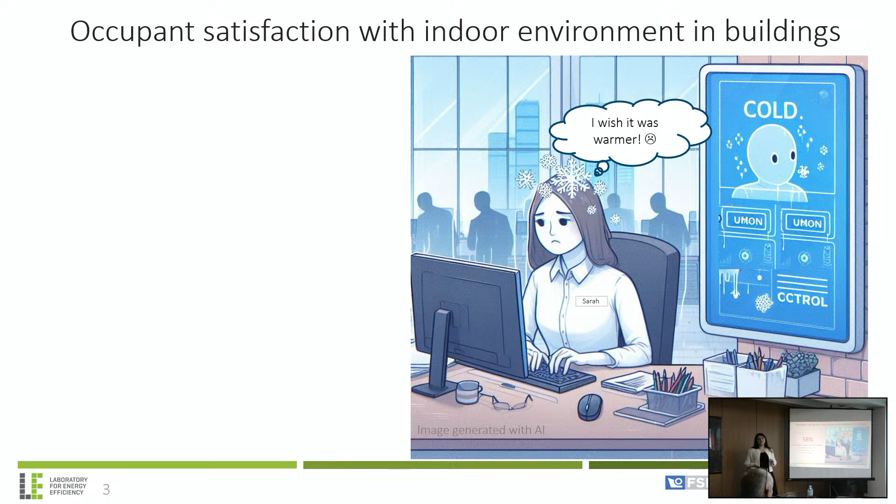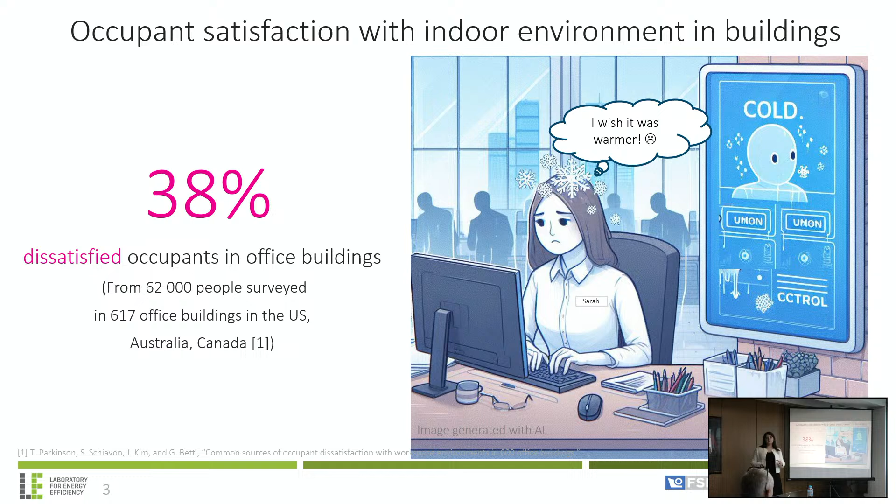So I'm going to start with a question that I think all of us can relate to, where we at some point have found ourselves being uncomfortable with the indoor conditions. So we were unsatisfied, and in some cases we even did not have the possibility to change the temperature setting or the indoor settings. And we are not alone in this, because 38% of occupants, based on a study made in more than 600 buildings, where 62,000 people were surveyed, said that they are uncomfortable or dissatisfied with the indoor conditions. Just to bring into comparison, according to standards, for a building to be operating well, it needs to satisfy at least 80% of its occupants.

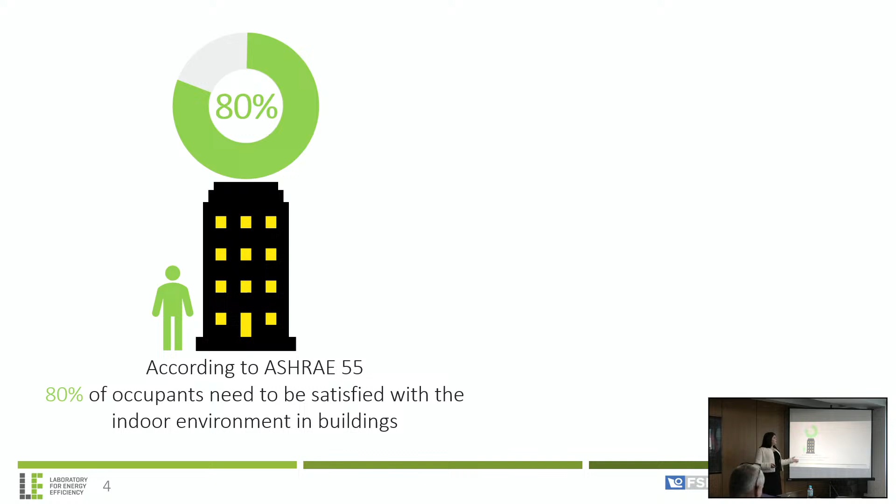And in another study done with more than 200 buildings, only 11% of those buildings achieved this 80% threshold. So the thing is that these studies were done in states like US, Canada, Finland, which means that they do not lack in technology or a proper control system or HVAC system, but sometimes higher automation or higher technology does not suffice for people to be comfortable.

So what we as engineers often forget is that buildings are actually built for users, and we should take into consideration the personal preferences of people, where some people simply prefer warmer ambience, some people prefer colder, and the usual root cause of this dissatisfaction with indoor environment is the individual comfort preferences and the lack of access to control. So that brought me to the first challenge that I wanted to tackle: how to integrate the occupant preferences into the automated control system. So how to enable this access to control and how to account for individual preferences. This brought me to a concept of human-centered control, which is a control system that prioritizes occupants.

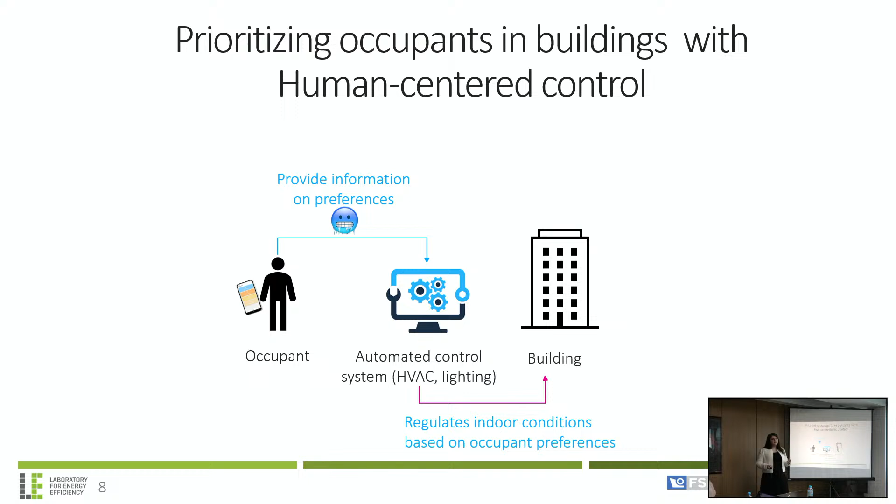Imagine this: an occupant or a person in a building reports their feedback or their opinion preferences either through a smartphone application or through another gadget. It provides that information to the automated control system, which considers that kind of preference and regulates the building based on those preferences. So this kind of integration of the user in a building enables us to have better human-building interaction while still prioritizing comfort, well-being, and satisfaction of occupants.

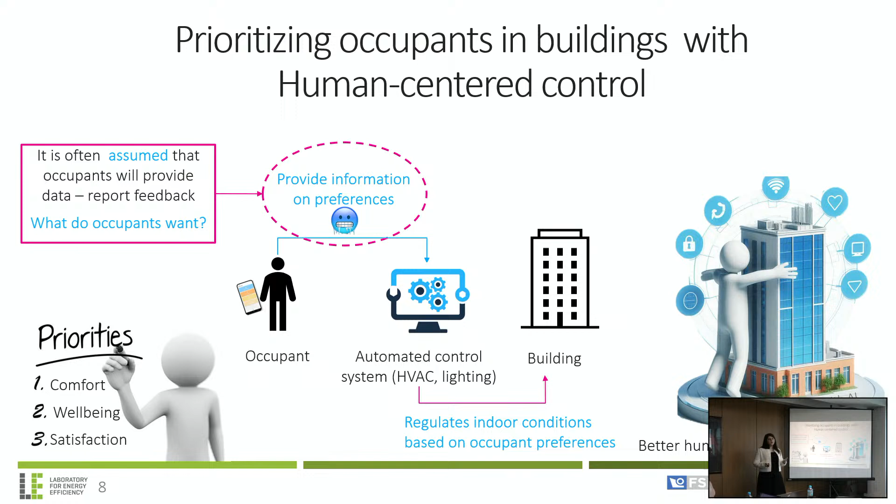However, in current research, because this is not a new concept, so people are researching it, this part where people are supposed to provide information or share their preferences with a controller is often assumed. So researchers assume that people will actually take a phone and provide their feedback or information. But the thing is, what do people actually want when it comes to this kind of interaction with the controller? This brings me to the second challenge: what are occupant preferences regarding the control systems, and are they willing to interact with the controllers by providing data?

When people are supposed to provide data, it can be tiresome, or it can be like a burden for them to report their feedback. What if we can learn those preferences and have a model that represents you? Imagine this: instead of providing information continuously, you provide it for a certain amount of time until the model learns your preferences, and you can create like a comfort model or your avatar, like a digital twin for you, which can know or represent your comfort preferences.

On the other side, when we speak of comfort, we often have this idea of thermal comfort, like temperature, but comfort entails different aspects as well, such as indoor air quality and visual comfort. This brought me to another challenge when I saw in the literature that most research focusing on personalized comfort models deals with thermal comfort only. And the thing is how to develop comfort models that also include visual and indoor air quality aspects, so to have multiple comfort aspects.

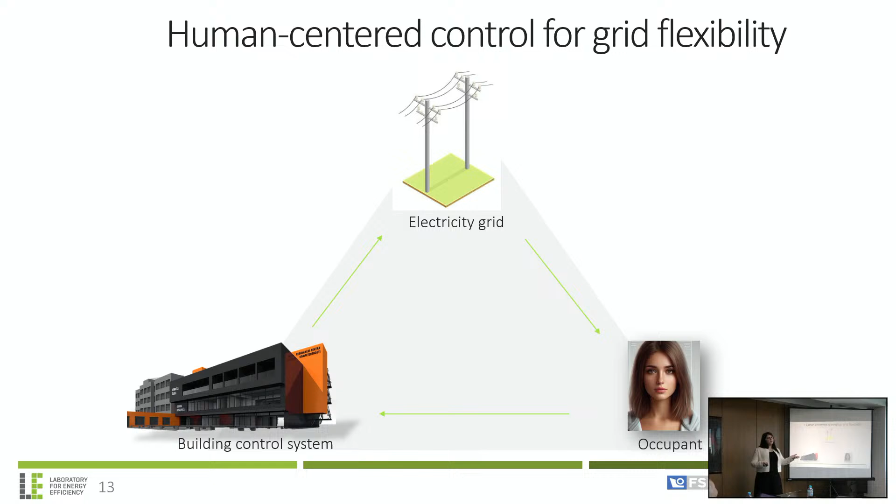Another thing, when we establish this human-building interaction, we can leverage it. We know that occupants are a significant contributor to the energy consumption in buildings. So buildings take the energy from the grid, and at times when the grid is overloaded, what if we can leverage this kind of connection to make a conscious decision on reducing the energy consumption, or use the energy from the grid when it has more energy than needed when we use renewables? So this kind of interaction can be leveraged with human-centered control. And this brought me to the last challenge: how to leverage this kind of interaction with occupants and control systems in buildings, and what is the impact of human-centered control on grid flexibility.

The goal of my thesis here is to provide a framework where we can integrate occupant preferences into building control by using personalized comfort models to regulate the indoor conditions. The hypothesis of my thesis is that integrating user control or using human-centered control systems in buildings enables us to increase the satisfaction of occupants with indoor conditions.

I divided this research into 4 topics. The first one deals with the human side of human-centered control by eliciting occupant preferences and their willingness to interact. The second topic includes the development of personalized comfort models, where I developed a method to have different comfort aspects for models. The third one is the integration of user preferences into the building control system, where I provide a framework on how to integrate users into the controller. And the last topic that I tackle is to define and quantify the impact of human-centered control on grid flexibility, so how to interact with the grid.

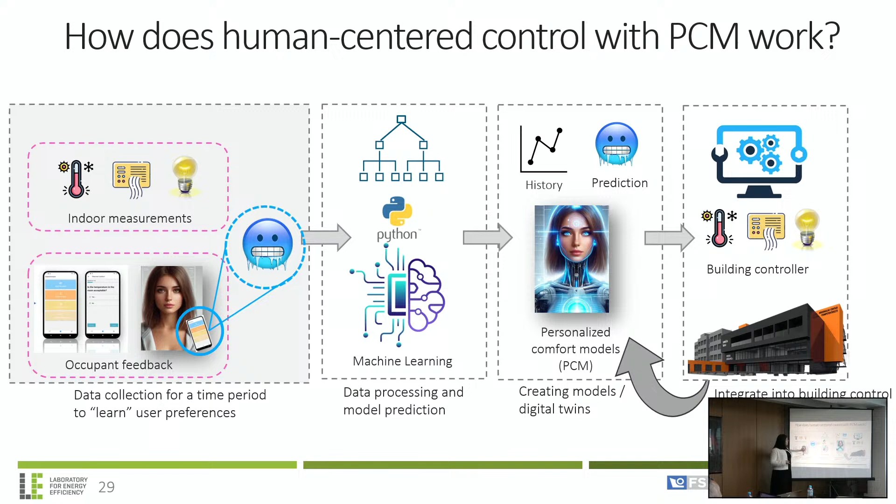And for instance, if Sarah here says that she's cold, then I collect this information and I develop personalized machine learning models which learn based on your historical provided data and can predict in the future how you would feel. These comfort models are connected to the control system of a building, which enables this integration. And then after some time, you will not need to provide information anymore, but the personalized comfort model will know your preferences.

So for the methods, I executed 2 experiments. The first one was a laboratory experiment where I collected data and I developed the personalized comfort models. The second is a field experiment where, again, I collected data, I tested the outcomes of the first experiment, and I integrated this human-centered control concept in an actual building. And I also employed machine learning models here to develop and compare different machine learning models.

So the first experiment was done in a laboratory, and here are the participants; 4 of them participated in the experiment. It was in an office for 3 weeks with 4 participants. Here we measured indoor parameters such as temperature, air humidity, CO2 levels, and lighting level. At the same time, they reported their subjective preferences and sensations, and I managed to collect up to 198 data points per person.

How I collected the subjective feedback: if you remember from the first part of my research, 66% of the users wanted to use a smartphone. So I developed a simple survey-based smartphone application where you can answer some questions to provide information on how you are feeling. I called it the Age Comfort app, and this can be used to report data, and the data collected here goes directly to update the personalized comfort models.

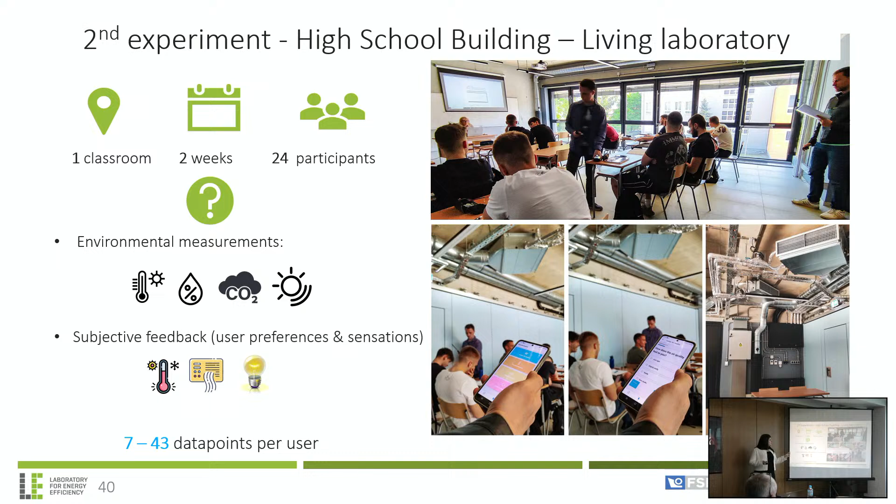However, here I had less control over the participants, so they were able to report whenever they feel like it, even if we nudge them to report feedback. So I had less data than the lab experiment and different feedback behavior of the participants.

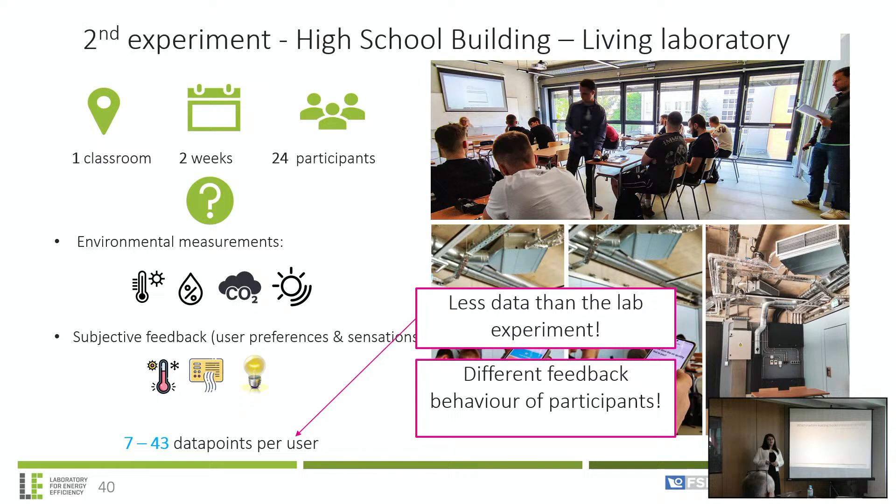So here again, I tested which machine learning model I can use if I have so little data, and I tested again the 9 different machine learning models, and I saw that decision trees work relatively well, even for less data, and for different engagement types. So even though I had some people with a very small number of data provided, this decision tree worked well.

So the takeaway from this is that regarding the set points, occupant preferences do not always comply with the standards that we have in buildings. The best models are these tree-based models, decision trees and random forest. Decision trees are particularly good when we have less data available, and we need at least 50 to 60 data points with variability to create stable personalized comfort models.

And if possible, it is good to have this kind of intervention days where you can on purpose make people feel uncomfortable just to know their comfort boundaries.

Okay, this brings me to the third research topic that I had, the integration of user preferences into building control. So here we had a kind of hands-on approach in a real building on integrating user preferences into a controller, and we saw firsthand what the user experience is, how people actually perceive or experience this kind of interaction with the building.

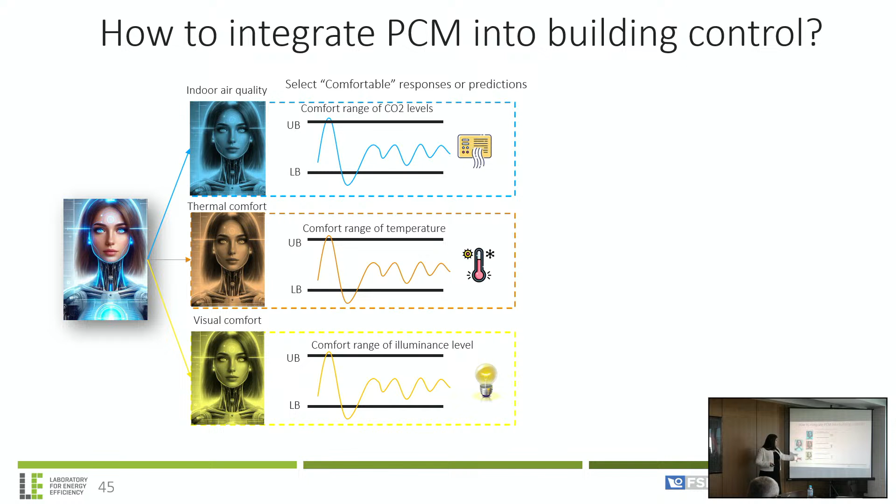So these days for testing were to adjust the building based on the comfort ranges of the occupants. So what I did is for one person, I developed their indoor air quality comfort model, thermal comfort model, and visual comfort model. However, in the building, here I'm going to show only the temperature. I did not integrate the visual part because we could not due to the constraints in the control system.

And the CO2 level was not needed because the preferences of the occupants were more or less the same as the standards. However, the different part was the temperature. That is why here I'm focusing only on temperature. And I developed the models, and I saw the comfort profile of the occupants, and I took a standard deviation with 95% confidence interval, which satisfies most of the occupants.

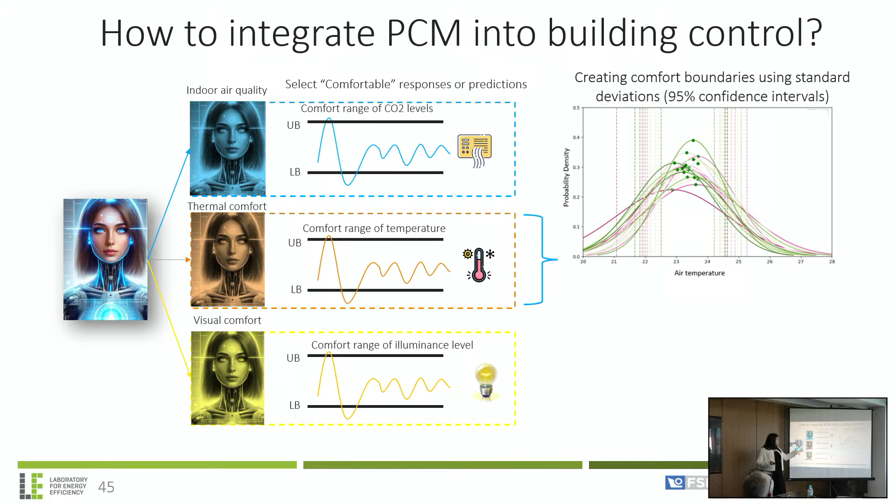So again, even if I have a different group of people, their comfort kind of overlapped with one another, and from the field experiment, this was the comfort range where most of my participants were comfortable, and this was integrated into the building.

So if I took this comfort range and I tested it for 3 days, I saw that before the integration, so the participants were not informed which days we are including their preferences and which days not. But before integration, when asked, 40.5% were satisfied, and after the integration days with similar outdoor conditions, I achieved 57.2% satisfaction. So a 16.7% increase and a 15% decrease in dissatisfaction.

This supported my hypothesis that implementing human-centered control actually increases the satisfaction of occupants. And now, if we have this 50% dissatisfied people, we kind of made our building go into that 11% of buildings that satisfy the ASHRAE standard.

And in context, what does it mean to have a 15% decrease in dissatisfaction? From the first study, where they surveyed 62,000 people, if we managed to make 15% of that group feel better or be more satisfied, it would mean that we would have 9,300 people more satisfied, which to me is a significant impact.

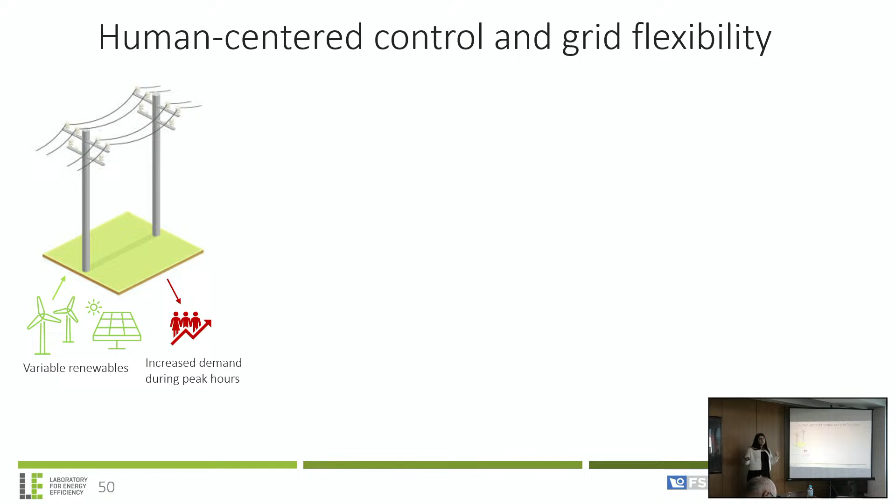And this brings me to the last part of my research, which is the impact of human-centered control on grid flexibility: how can human-centered control affect grid flexibility, costs, and comfort. Nowadays the electricity grid has a lot of renewables and also increasing demand in energy consumption. So we have grid overloads and fluctuating electricity prices, as we can see in real data from the Denmark energy grid. Here the red line is for January and the blue line is for August, and you can see how it varies for different hours during the day.

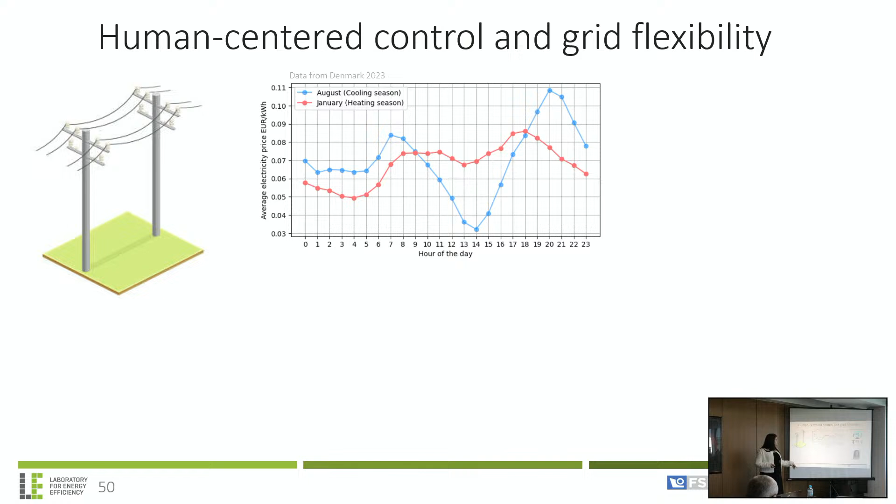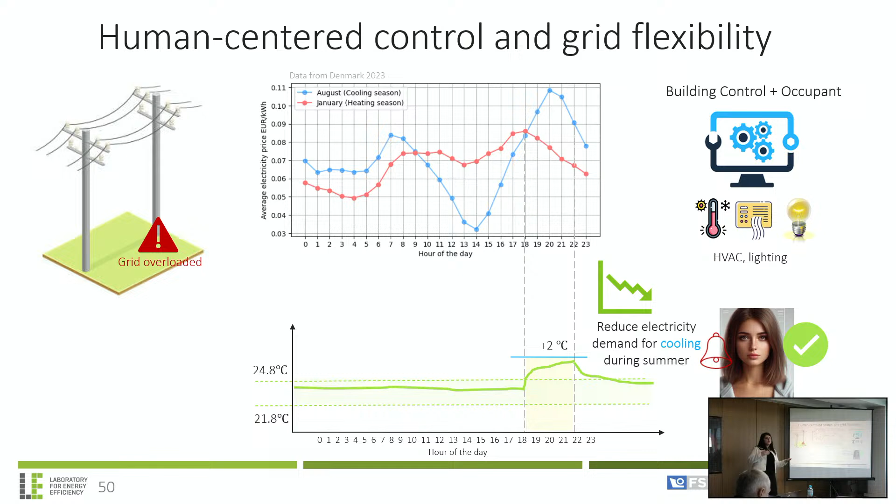If we can leverage control systems and humans in a building, then if we inform the occupant that the grid is overloaded, for instance, here we take Sarah and her comfort boundary. If she accepts less comfortable conditions, meaning she will reduce energy consumption, this would lead to a reduction in energy consumption, which will enable grid flexibility.

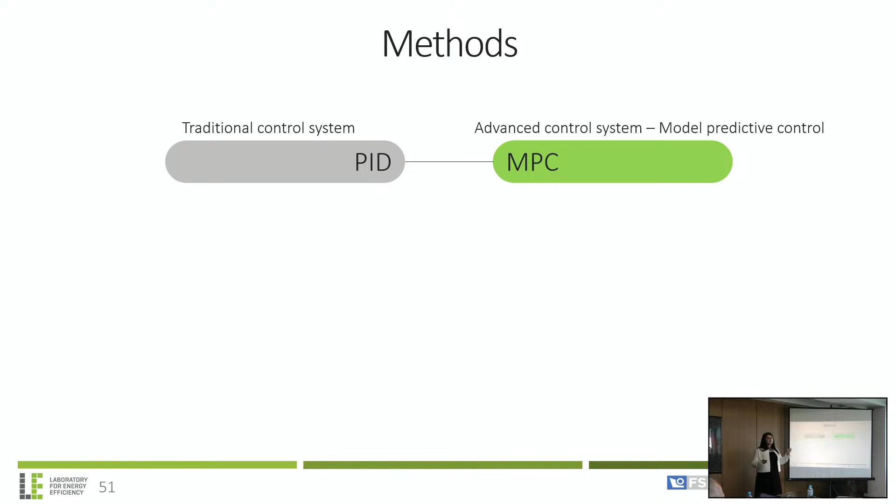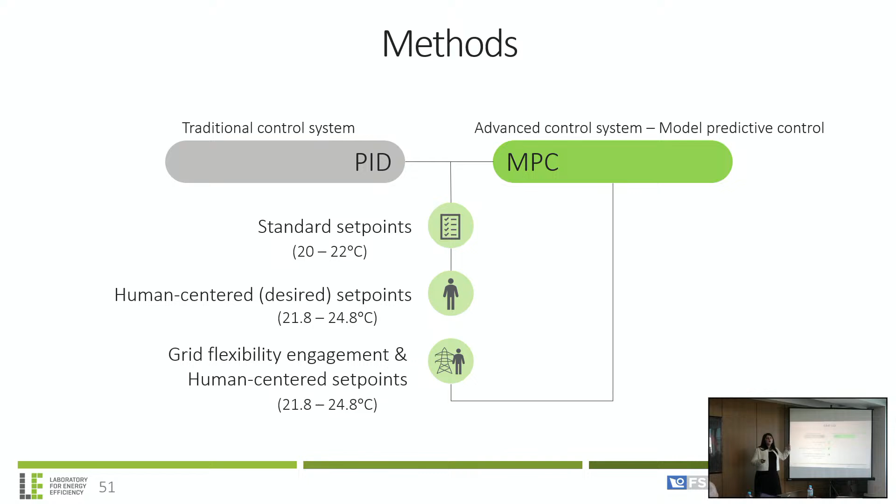I tested this by using simulations with 2 control systems. The first one is a PID control, which is the traditional control system used in most buildings. And then we have an advanced control system which uses prediction and is not that much deployed in buildings. I tested them for standard set points, human-centered or desired set points of 21.8 based on the field experiment, and the last scenario is using the same human-centered set point, but engaging the occupant in reducing energy consumption with the grid, so engaging in grid flexibility action.

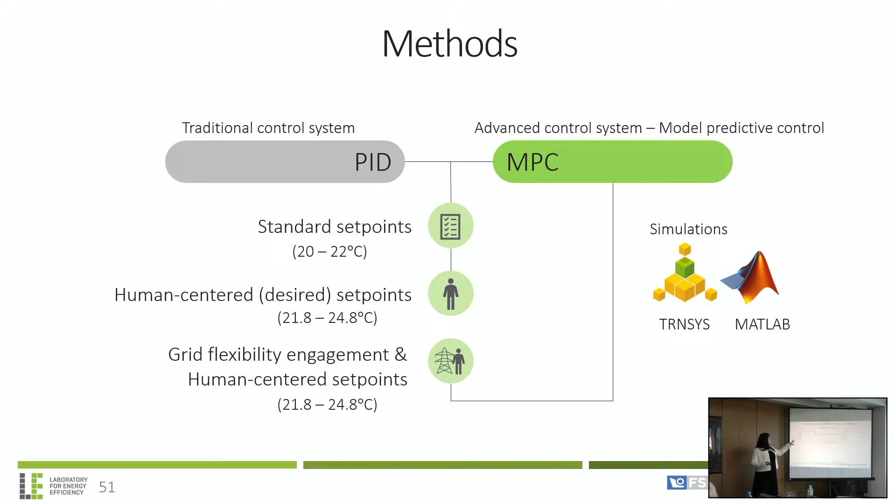The programs used were TRNSYS and MATLAB. This part of the research was done in collaboration with another PhD student, so it's a joint effort. And here are the results. We have the performance of different control strategies. I tested different scenarios, but here I will present only 2 of them.

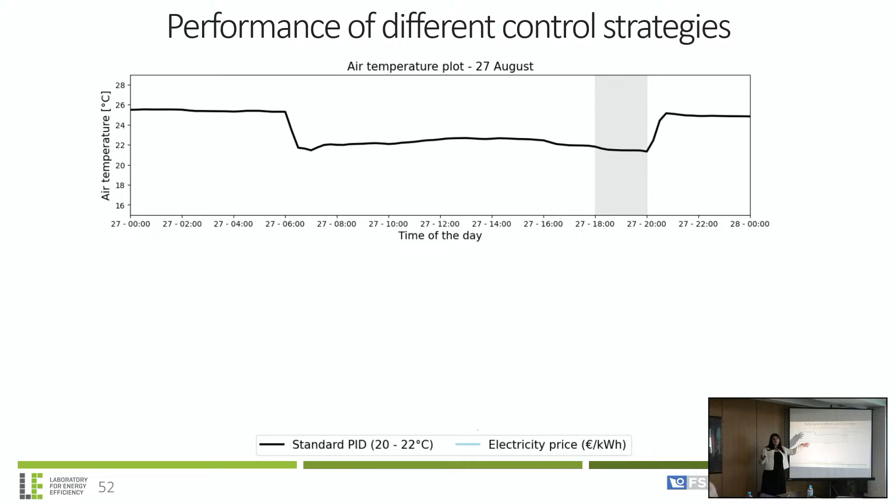This is how the building operates with PID control, with standard temperature for a day during the summer. On the x-axis is the time of the day. The gray part is when the grid is overloaded, during the peak hours. What happens with the energy consumption is that it's quite high, and also high during the peak hours, when, as this blue line shows, the electricity price is higher.

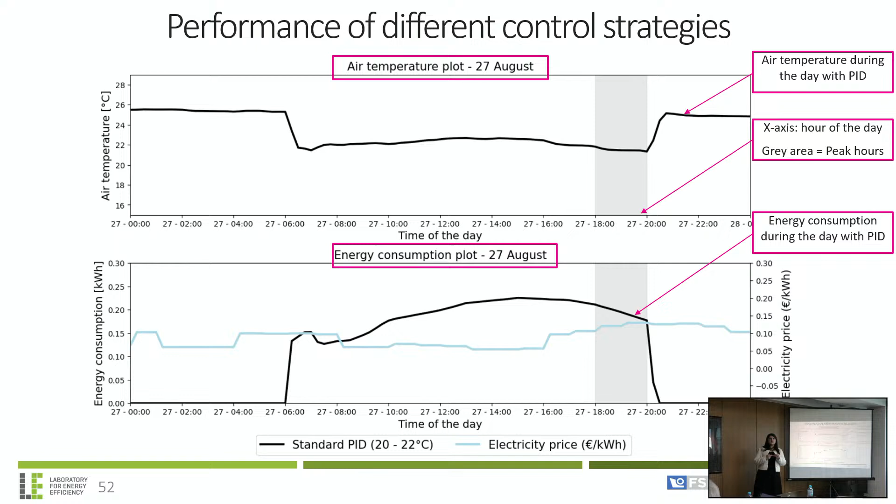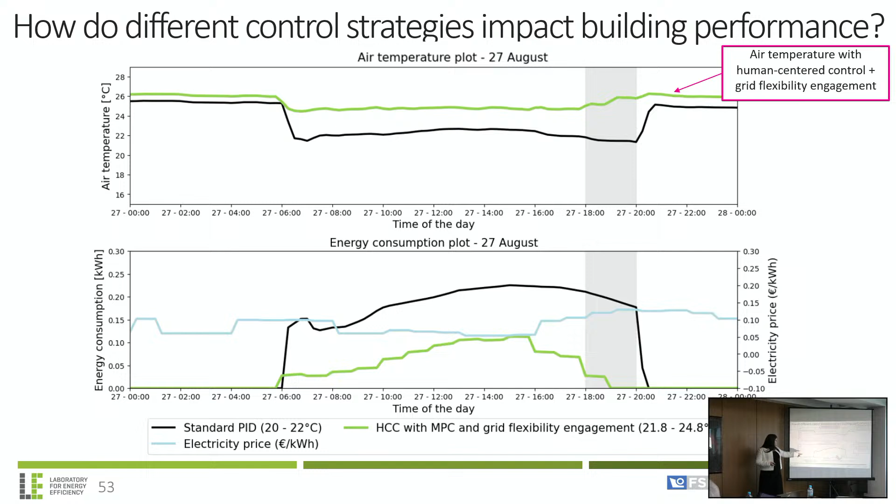So if we use this modern control system, model predictive control, and we engage occupants in grid flexibility, then we see this change. The green line is when we use grid flexibility engagement and human-centered control with model predictive control. And the energy consumption is significantly reduced, especially during the peak hours, because this kind of control system enables load shifting.

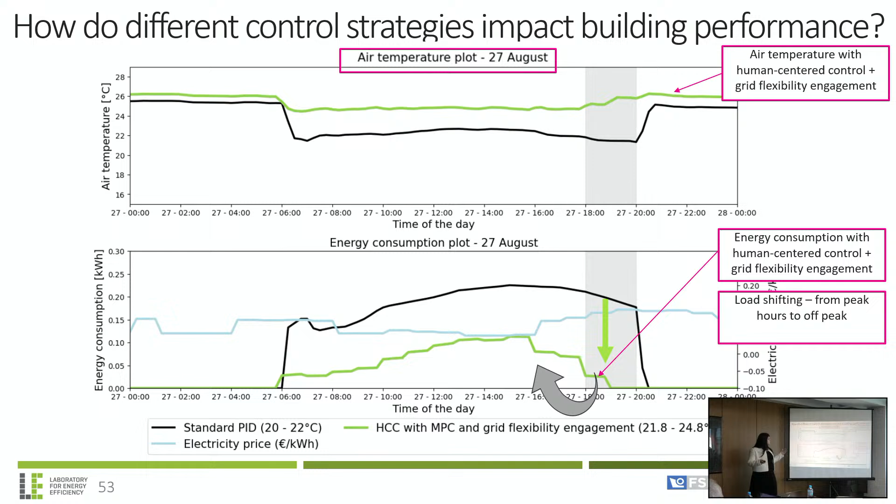So it uses energy here where the electricity price is lower, and then reduces the energy consumption when the electricity price is higher. If we talk in numbers, this grid flexibility using model predictive control, this advanced controller, and human preferences enables us to shift 21% of the energy from peak hours to off-peak hours during winter. And during summer, we have 88%, because during winter, people prefer it warmer, which causes more electricity use, so you cannot shift that much, but during summer, it enables a lot of shifting.

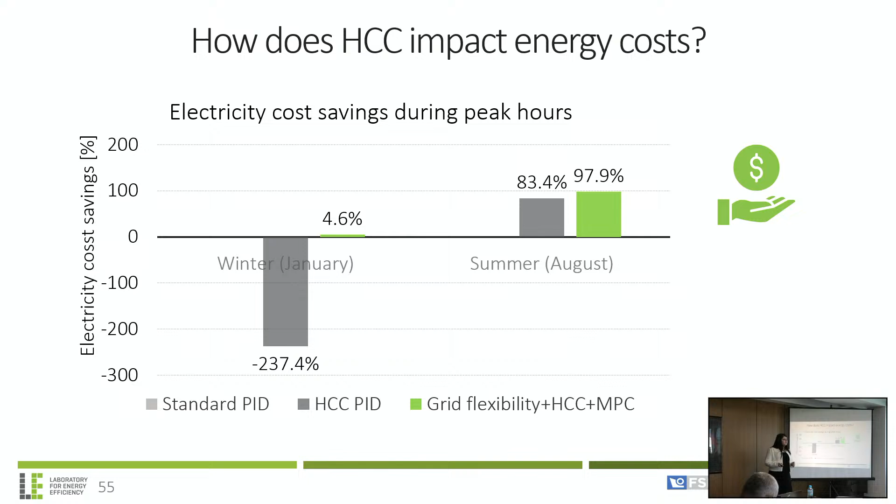Regarding electric energy costs, if we integrate occupant preferences into this traditional PID control, we have more than 200% increase in cost, which is terrible. But during summer, we can achieve some cost savings. And if we use this novel control, we have during winter 4.6%, which is not much, but still positive. And during summer, we have 97.9%.

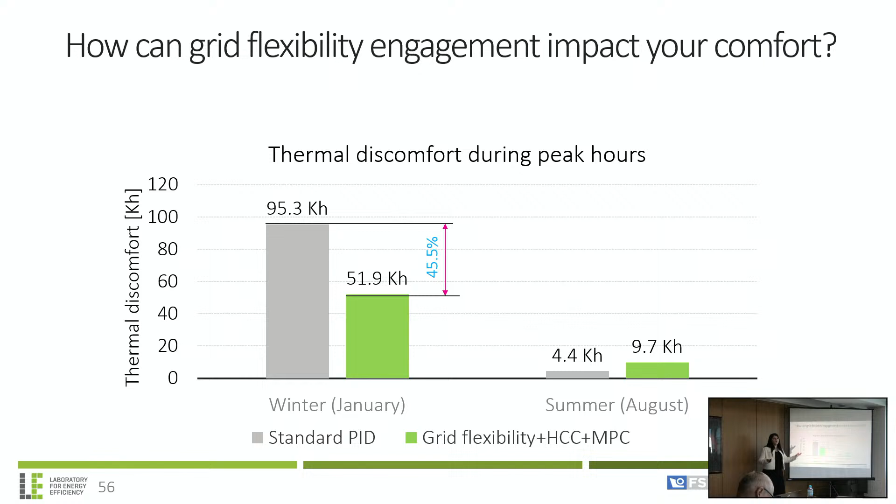The takeaway from here is that if we use grid flexibility with human-centered control and MPC, we have high load shifting ability of the building. However, if we use human-centered control where we take into consideration occupant preferences with traditional PID control, it will cause a lot of energy consumption and higher costs during peak hours. And the third part is that we have some discomfort, but it's agreed upon. So you are willingly accepting less comfortable conditions.

So in conclusion, I presented work on providing a framework to predict the willingness of occupants to interact with human-centered control and their insight on preferences. This is useful because if someone wants to develop human-centered control, they can always go back to my findings and design their human-centered control based on actual user preferences.

And I also provided a method to develop multiple comfort models for multiple people, which is important because with the framework I have, the application and how the data flows, I can create models for any occupant in any building. And also the framework to integrate human-centered control into a predictive controller is a proof of concept study, which was actually deployed, and it can serve as an example of how to do that. And the definition and quantification of the impact of human-centered control in grid flexibility, showing the potential we can have when integrating users.